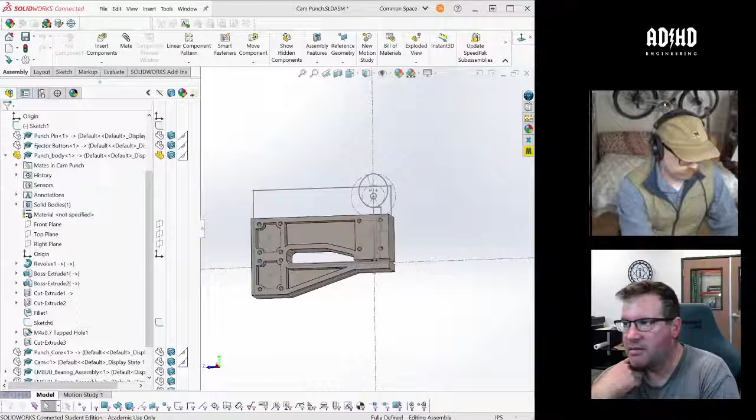Every week I'm like, man, I need to talk to AT&T and figure out what the hell's going on. And then, by the time it comes around, I don't.

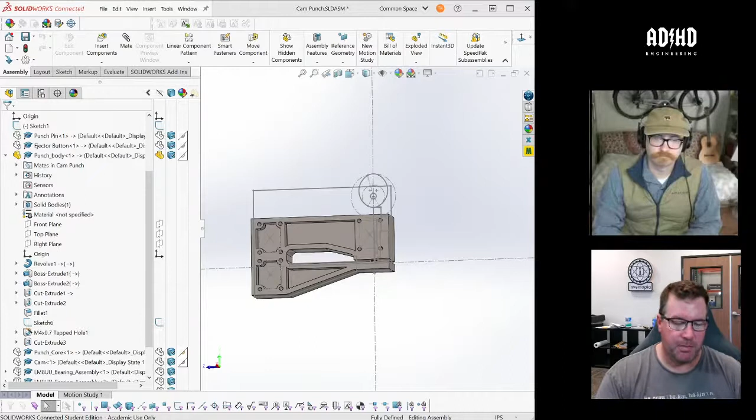The punching process is a pain in the ass. There's a website you can go to called Music Box Maniacs, and you can basically download these files and it outputs them for different types of music boxes, and then you have to transpose it and then punch it, and it's a pain in the butt.

But here's what, hopefully you can hear this. Come on. No? There we go. Are you ready? Live music. You ready?

Sweet, looks pretty good.

So I already know what that is, even though I definitely did not know you were going to play that, but that's great. That's the Office theme song. Yes it is. I thought it was going to be a little too on the nose if I started with a Wintergatan song.

Also, the song I'm really excited to play, that Sommarfågel song, is super long. I actually had to truncate this song to fit it on this piece of paper. But they do sell rolls of this paper that's like 20 meters long or something like that. I got one of those.

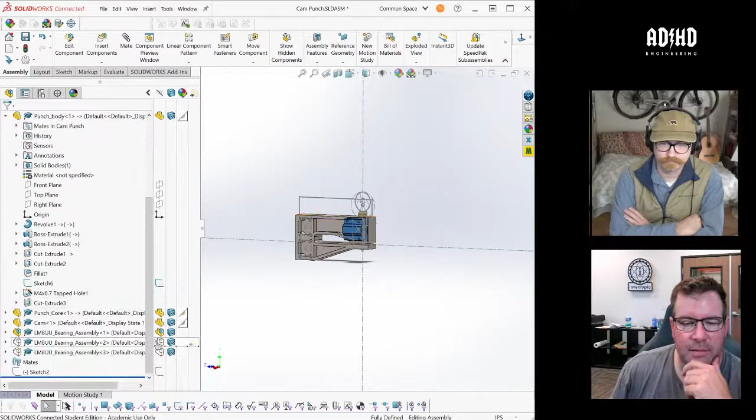So the idea is that we'll be able to put that piece of paper into the same music box, just pull it and write the music, and then switch out the playheads, switch out the punching head, playhead, and go from there. So anyway, that's kind of the idea.

Last week we were kind of talking about this thing. I need to mute my - I'm getting diabetes alerts from my son, pushed to my phone. Like, yeah, somebody ate some candy. I can tell across the internet and in real time. It's a new level of oversight there.

I know, yeah, if you didn't think I was a helicopter parent before, welcome to the future.

So anyway, this is what I was working on this week with this thing, and let me make sure I have... sorry, I need to make sure I have my windows open.

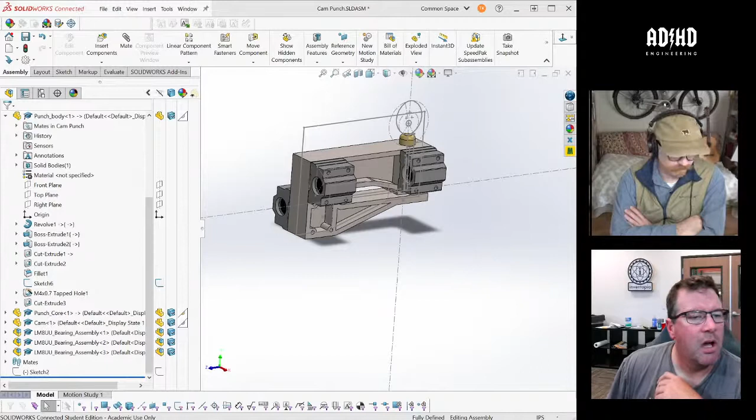Hey, Amos is with us today. Hey Amos, make sure I can see... where is he? He's on YouTube in the comments, in the YouTube chat. Cool. Hey Amos, so actually it might be good that he's here, because if we have questions about the

Configurations sort of thing. But anyway, this is my current approach with the punching mechanism for this box. Basically, we have a stroke of 72 millimeters to be able to shuttle back and forth across the paper, and then there'd be a punch here. This one will be operated with a cam attached to a gear motor.

I haven't drawn those in. I kind of had to go back and redo it. These are LM8UU bearing blocks. They are all over the place. They're used in a lot of 3D printer designs. They support an 8 millimeter shaft.

Obviously, I have some fillets to add to the corners there, but this is going to be one piece of steel. So I have 1 inch thick stock that I can make this from.

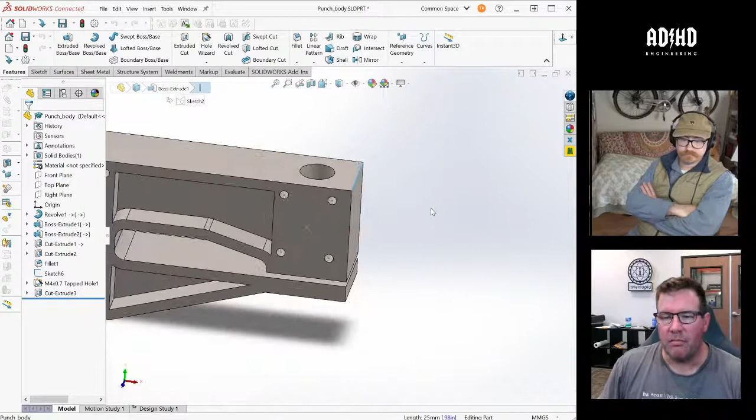And basically, this is going to reach over the paper and be able to punch it from both sides. And each of these mounting squares are where the brackets go, the linear components go.

And this is going to be hard to manufacture. I'm going to have to get a slitting saw to make this little narrow feature, and I'll be able to come through on both sides to make that clearance hole.

But the idea is that I can make everything line up. I haven't drawn the bottom hole, but I can make everything line up by machining all of the concentric bore features at the same time, so it'll automatically be coaxial.

I was worried about the punch coming through and not being able to line up the hole in the die. So,

Amos, I see your comment. We are in the E-Team meeting room. I don't know, oh yeah, maybe we should be in the CAD team one. I think that's usually what we have done. Is it? Because not everyone has access to the E-Team one, right? Right, I don't know, all right. Well, if Amos doesn't have, let's just hop over there while we're doing this.

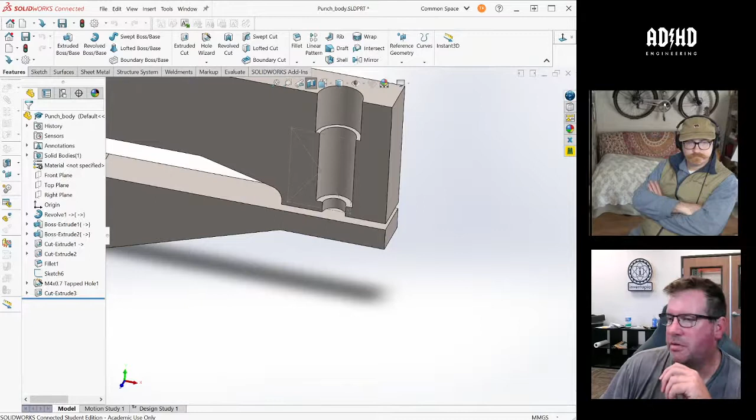So in any case, that's kind of the idea with this thing, is I'm going to start off with a big piece of iron, and then mill it away. I have to add these same kind of relief cuts, try to make it not be a billion pounds. So that's the idea, you could just have the holes going all the way through for the relief cuts if you want.

Well, you're not live, by the way, Tim. What's that? You're not live in Discord, Tim. Oh, sorry, share my screen.

So yeah, so that's the idea. This thing in cross section, I want it to be like an I-beam, basically, right? Have that kind of thing. I want to remove that kind of profile, but I do want the web in between. I don't want to cut all the way through. I want to leave that middle beam, but kind of lighten it up a little bit.

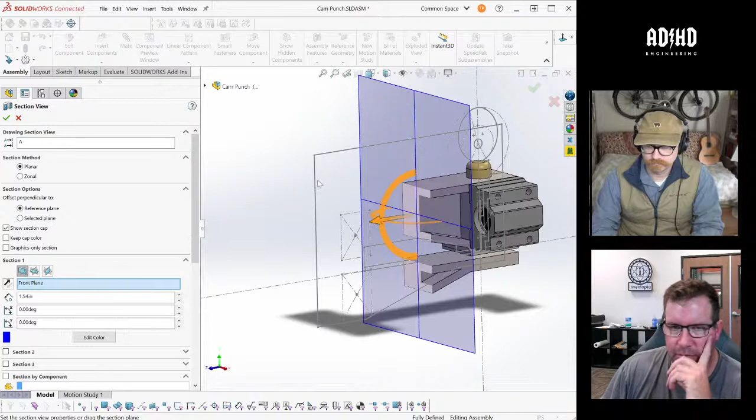The fun thing here on the punch, and I wanted to do something simple, and keeping this project simple in general is a good idea. But as I started working on it, I realized I had to do something a lot different.

So the way this is going to work is that the paper needs to be held by the punching mechanism, and here's one right here, right? If you look at this thing, there's a metal piece underneath it, right? And that holds the paper still flat against the hole as it punches through, because otherwise the paper wants to come up and get dragged into the hole. You need to hold the paper flat and then punch through.

And I know that when I've seen a lot of people making dies for cutting labels back when I was in the wine business, etc., they always had these basically like razor blades that were embedded in neoprene, and the neoprene would push the things off of the die. So

The way this is going to work is that there's going to be a spring in this cavity right here, which will allow this whole piece to move up a little bit, and it also is what pushes this ram of the button down.

So the paper will come in here, it'll be held against this thing by a little bit of spring pressure, and if there needs to be some compliance there, it can float up and down.

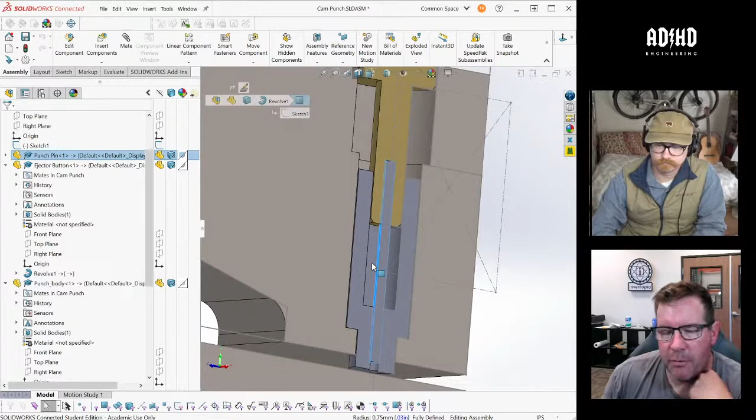And then this punch, this is a hardened punch from McMaster-Carr, for an ejector pin for a die or mold. I'm going to have to cut it down a little bit, and then this will be brass. So this guy will bear against this surface, this guy will bear against that surface. The punch will basically be brazed into this, or just soldered in, and then I'll be able to get everything to line up by making it all in one operation on the CNC.

So you need a hole on the bottom as well, so that the punch can go all the way through. Yeah, I haven't drawn that.

The math here is that I want basically a 7mm stroke, because it needs to be able to clear, and this punch needs to be able to push the paper all the way out the backside. Otherwise, you're going to have a plug of paper in that channel.

But anyway, so that's the punch head. That's kind of what I've been working on this week, and it'll slide back and forth.

I just got this thing, so I need to measure the punching force. I need to figure out if the metal gearboxes are going to be like the Pololu ones, which have these metal gear motors that have a lot of torque and move relatively slow. But I have to actually measure the force it takes to punch the paper, and then work it backwards to figure it out.

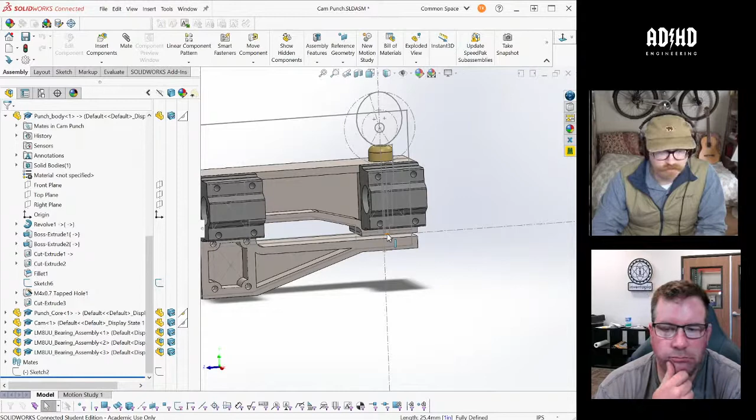Tim, looking at your feature tree, I don't see a shell feature. How did you get those cutouts? I drew them and then cut them.

There's a one-step feature called shell that can do that. Yeah, but I wanted to leave ribs in certain places. I'm fully aware of the shell feature, but I wanted to leave it here, and if you shell this thing, I can show you before that, you get some geometry that is hard to make and that I don't actually want.

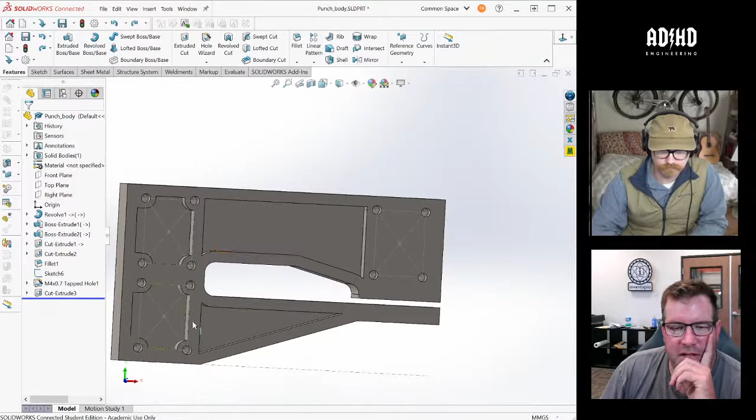I'm actually going to go ahead and on each of these sides, on the side that doesn't have the motor mount or the linear bearing, I'm going to take out these webs. This isn't, in terms of CAD best practices, still on the experimental side. I'm designing it as I'm drawing it, I'm not being incredibly deliberate about CAD, which is okay.

It's okay. Hey, we got new people in the chat room too. Oh yeah, Lund is here. Lund's here, happy to see him. I don't know the other guys.

It's okay. So anyway, that's kind of where we're at with this, and then I don't think I've put this into the larger Marble Machine CAD. So not the Marble Machine, the Music Box CAD. So this is what I have thus far.

I've had a little bit of experience working with these pillow blocks, and I feel like it's pretty hard to line them up. I don't know if you have any specific solutions to that. Yeah, you just have to - already as it is, the pillow blocks I'm using are threaded on the side that is going to actually be a clearance hole. So in this model, these threads are going to be tapped, so I actually have to drill through from the backside. I'm just going to make those holes a little oversized, and then basically put it together and tighten it up once it's all together.

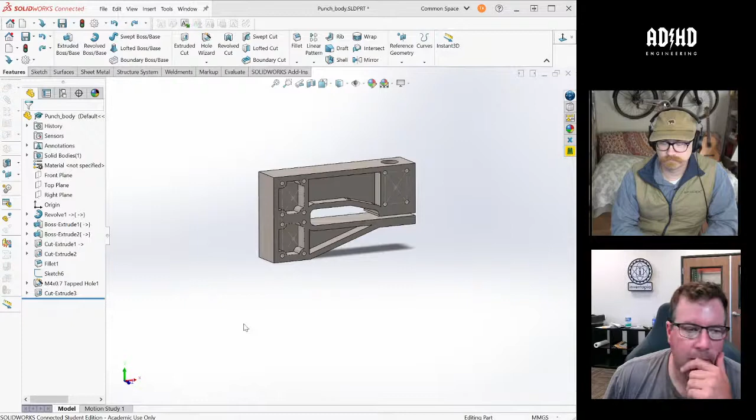So I'm loading in something, it's interesting. Oh, there we go. This was my previous version of this part, which was basically to use a solenoid to pull a ram. I didn't like the mounting plate on this, but basically it pulls this ram. This solenoid is the beefiest one I can find on McMaster Carr. It has a 1-inch stroke, and I'm turning that into 7 millimeters of punching distance using this linear slide cam. So this would be a block of Delrin, a couple pieces of bronze, and then this thing would go through.

This design doesn't have the ejector button on the bottom, which is not as good. Plus, I would have to make a hole here and a hole here, and everything would have to line up. I like the idea of machining all the parts that have to be concentric in one setup on the CNC. I just think that's going to be easier.

So, yeah, I don't know if it's easier necessarily. It could actually be more complicated in the end, because now you're thinking about going and buying a slitting saw and things. It'll probably work out in the end. But when you're doing things, especially prototyping, you don't want to go for perfection, and you want to stay within what you can do.

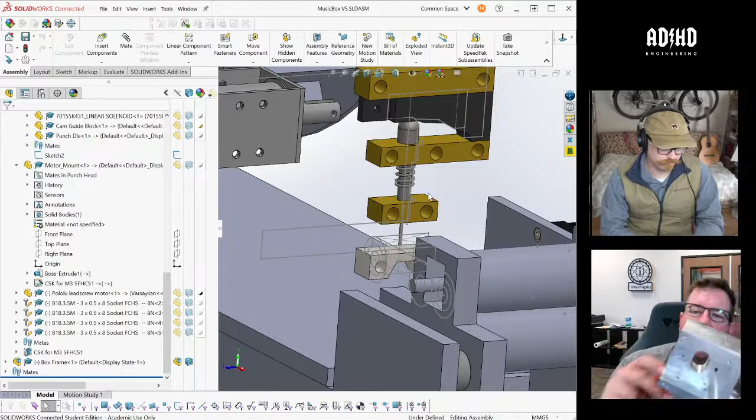I have to machine every single side of this thing. For a prototype, normally you'd say you don't do that, but this isn't a problem for me, I know how to do this. This isn't a technology risk, and that's generally the main thing — when you're doing these things, you want to avoid unnecessary technology risk.

For me, the new technology with this product is these new servos I want to play with. They can move super fast — you can just tell them to go, and they'll try to move as fast as they can before the expected position versus the real position starts to lag. So I didn't want to make something mechanically that's not totally rigid. I wanted to make something insanely rigid.

From this angle, I have 3 different size bores, a ball bearing, and a bearing that goes down in the middle of that, same thing on the other side. It's not the easiest, not a simple part, but it's a part I can do, so I'm not afraid of that. Like, a slitting saw, I've never done that, but I'm confident I can figure that out. It's not a reach.

That's like bragging.

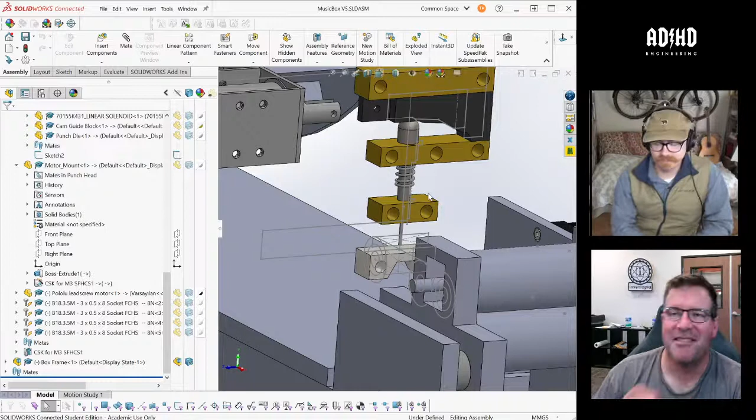No, it's just there are a couple of things to know about slitting saws, and the finishes they leave behind, and things that might end up compounding into other issues to work out. It might not just be about getting the saw, it's also about finishing the corners.

Yep, you won't have access to those two faces after you cut them. The other thing is spring back. Once you slit that, all the relief from those two massive pieces of steel separating means you might not end up with those holes aligned anymore. Probably close enough, but still.

Right, well this is going to be hot rolled steel. At least the stock they already have is, right.

So have you ever seen a YouTube channel called Edge Precision? This guy is basically, and it's a little bit like Abom79 too, where the takeaway from that channel is that machining is all about setting up, measuring stuff, taking a cut and seeing what happened. He was making a T-shaped drive shaft out of a 2,000 pound piece of metal, and showed how after taking off a lot of material, once he took it out of the live center there was deflection because of stresses in the metal, and once he relieved a huge amount of material on the side, it actually moved.

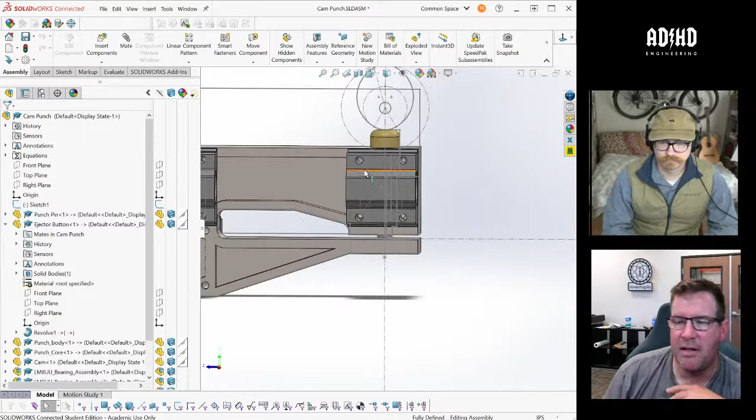So I think what I might actually do is make this slit and not relieve underneath here. You see this is a square piece, but make this slit so these parts can flex away from each other a little bit before I do the holes, because this is going to be in the same operation. The slitting saw can run all the way through here, so that if it wants to separate, it does that before I do the holes. I think there's a better chance of them being concentric, having given that movement a chance to happen once the two halves separate. Do that up front, yeah, that's the idea.

Anyway, so yeah, that's kind of it on the music box front. The drive rollers haven't changed. I worked on this configuration with these slides, but I've abandoned this, and so I still have to source a gearbox.

I still have to measure the force required to operate the punch, so that we can look at the torque of the motor and make sure it's going to have enough to get through there. I probably want a safety factor of 3 for that.

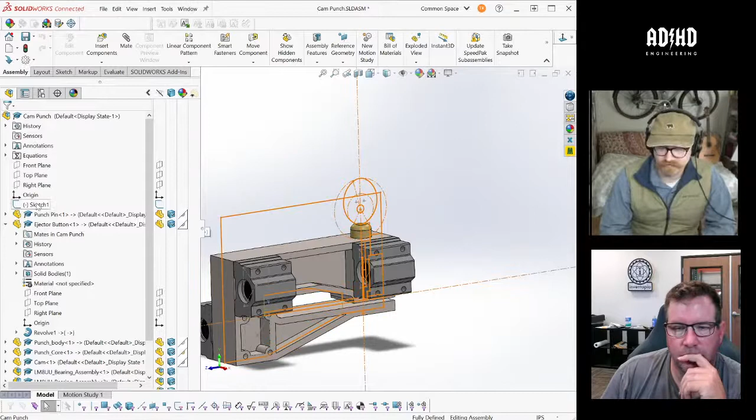Yeah, so this is the kind of thing you can actually test in the layout sketch in SolidWorks if you set it up right, that kind of cam-following motion. It's really good for that.

Yeah, I just, are there cam tools? Oh, there sure are. Really? Yeah, because I just made one that looked right. You can tell it's not quite... Sketch Tools, do we have this? Is it in Sketch Tools? Where are the cam tools?

It's actually not. If you go into the SolidWorks add-ins tab, there should be a cam feature in there, I believe. I wonder if it's just not enabled in SolidWorks Connected, or at least it has to be enabled. Let me look in mine, because I'm pretty sure I have that feature.

It's kind of a tangent anyway, but yeah, if you can pull it up quickly, then why not? I just did one where I set the distance between this inner circle and the outer circle to 7 millimeters. Let me get out of this.

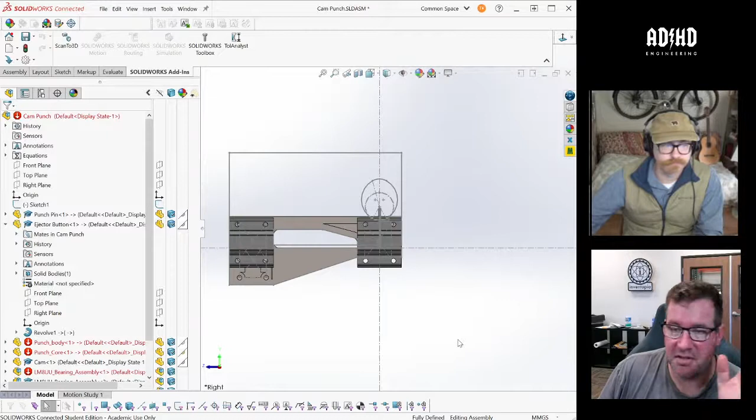The only thing that Fusion does that SolidWorks doesn't, as far as I've seen, is that SolidWorks will kick you out of your sketch when you change units.

Well, just out of curiosity, what's the point of changing units? Just because if my brain can't get around how big something is. I like to design in metric, right?

But I live in an imperial world, so I always turn on dual units. You just turn it on so all your units are dual? Yes, every dimension shows both inch and metric, and it's very helpful. Then you can live in both worlds.

The other way is when you enter a value, instead of calculating how many millimeters are in inches, you can just enter 1 inch and it will populate it in metric automatically. I do that all the time, whatever the metric is.

But sometimes, especially when I'm tabbing between SolidWorks and a supplier page where they're in inches, I'll toggle my SolidWorks into inches so I can see if this is compatible. But I actually think Amos's suggestion is probably the best.

Where is that setting, do you know? Is that in system options? It should be in options. If you go to tools, then to the bottom, it's options, and there should be a setting there.

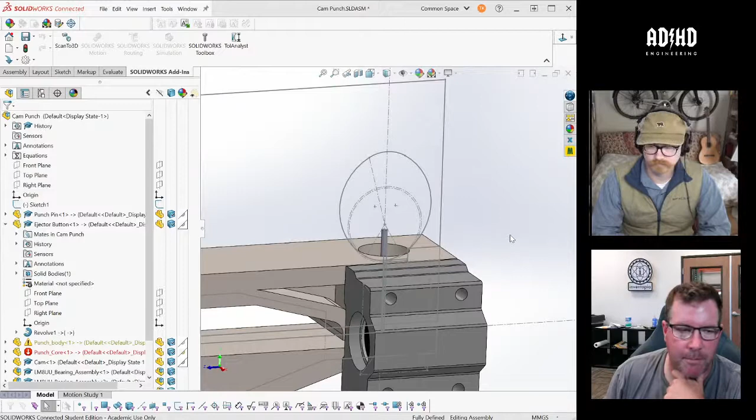Good, I missed the beginning. Oh, look, when I switched my units in that thing, it totally messed up my whole setup.

That's gross. All right, I'm going to close that without saving. Discard, let's see. All right, yeah, what, that's so weird. I don't know what happened there, but I was able to leave it without saving, so hopefully that will be fine.

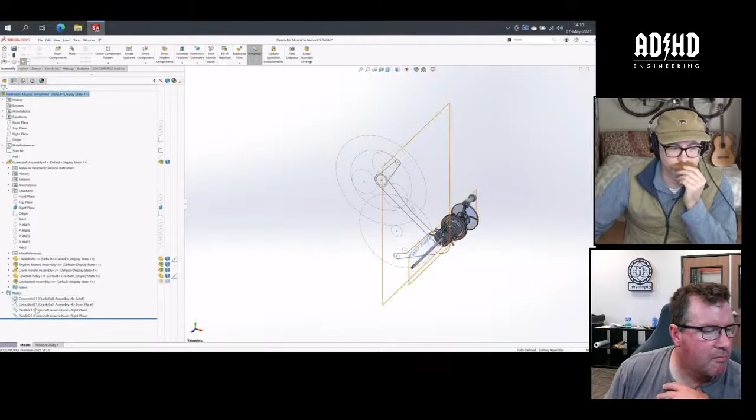And while we're at it, you can watch David load the crank handle. Let me see. I'm going to duplicate my... here. Nope, that's not it. There we go. So this is great. Well done, Tim.

This is called Fun with OBS, featuring Tim Keller and David Lewis. It's comedic relief. Oh geez, what are you doing over there? I know, it's horrible, I tried to. Wow. Okay, sorry. Oh look, I also messed up my reference one too. So that's amazing too.

Back to that dual unit display thing. Yes, it is a document setting, so you have to set it up in your template so that all the files that you make have that setting. You can turn it on for any document that you have open, and save it with the document, and it'll be saved going forward. If you go to the document settings and click on dimensions, the very top, not a specific dimension but the first one where it just says dimensions, right there is a dual unit. Right under the font button, there's a dual unit display checkbox.

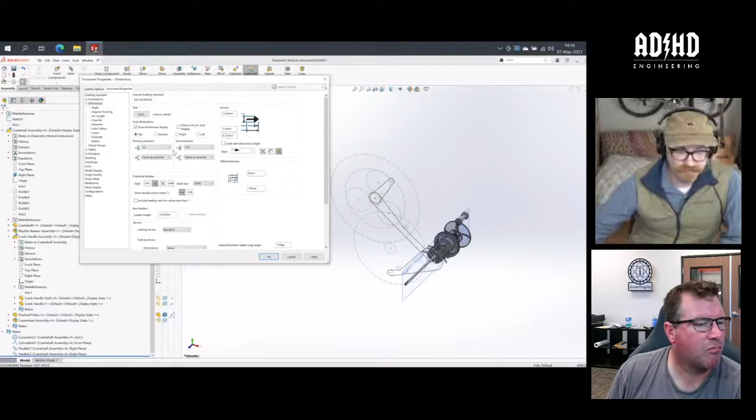If it looks like... because SolidWorks will estimate the number, or what do you call it, they'll round. Thank you, that's the word I'm thinking of. It will round, so it's much better to know if it's in 3 digits for a lot of reasons. But again, if you're a machinist, you know that in the metric system, all code for the metric system are generally, unless it's a special feature with 4 decimal places, uses 3 to the micron. So you might as well just design in the same units that you dimension in. Yes, so that's generally what I do. Or, sorry, design in the same units that I machine in.

So anyway, what you're seeing on the screen now is actually the Marble Machine file itself. This is going to be the end product, and I actually just moved this to its own collaborative workspace. This is now in, I think it's Marble Machine Studio collaborative folder, and that's all it's going to live there. It's just this guy, so that my other one, the working one, doesn't get all cluttered up. But anyway, I just opened it to show you that essentially the way this is set up now, it's fully defined. As the assembly grows, there'll be more and more stuff added, and this thing will be huge.

But I wanted to show how mates work when you're building it, but you want to test motion. So I've actually fully defined this particular subassembly so that it doesn't move. But all I have to do is suppress this one particular mate, and then now I can test to see if it turns. Well, sorry, that was the handle, I didn't need to do the handle.

That was the handle. What did I do? The heck? Okay, I don't know what the hell just happened, because I definitely...

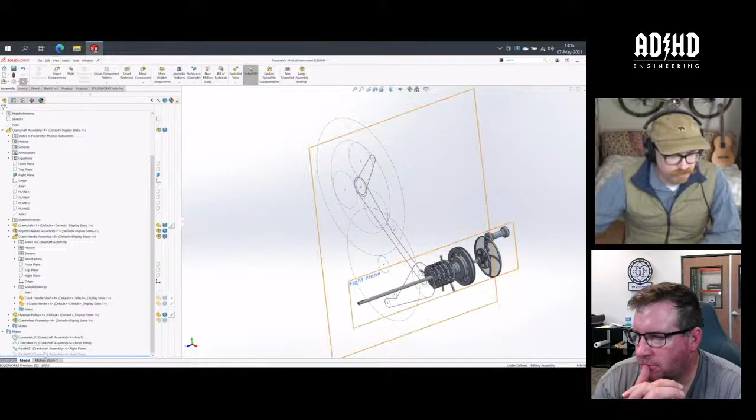Because you're giving a live demo. Yeah, exactly. You can see the handle, that's the one I am suppressing now. And yeah, so that worked. Then if I suppress the whole crankshaft, now it should be... and it's not. Okay, I give up. Anyway, that was just for fun to show.

Anyway, I'm going to close this, and we're going to talk today about the rhythm machine, which is actually here.

Okay, so the topic, a little bit of background here. David sent me a message saying, 'Are you ready for configurations?' And I was like, please, because I know they exist, I know they make a lot of things easier. I actually personally want to use them if I can, but I never have. So if you hear me asking a bunch of dumb questions, it's because I have zero experience with configurations, and I'm eager to learn. Sorry. Okay, yep.

No, that's fine. So the rhythm beaters that I designed originally, I recreated in SolidWorks. I did it as a part, based on the detail file that Andre did. Right, so if you know anything about...

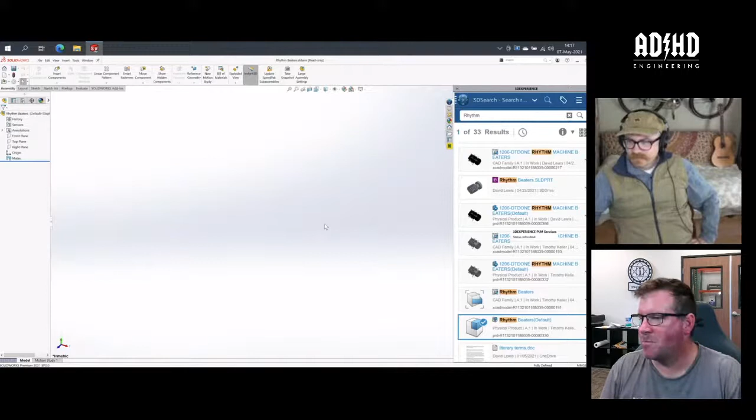Actually, where is this? Did I delete this already? I might have deleted it already. Hold on a minute. That's what? Did somebody? All right, this is weird. It's been corrupted, it's now educational. Well, not only is it educational, it doesn't exist anymore. I don't know what the hell's going on with that. I don't think I touched that, but everything I touch will get corrupted to educational for sure.

Well, I guess it doesn't matter. I was just going to open the original one that I designed as a part. Here it is, this is it right here. I don't know what happened with that. Okay.

And any day now, what is it doing? Yeah, you got to be patient with Connected for sure. Just a totally random thing, I just tried to update my 3D Experience to the latest version, and it was like install failed, and now I can't do anything. That's great. Okay, so yeah, and this is the mystery one: some files could not be opened. It happens almost every time I try to open something, but not all the time, which is weird.

But okay, so when I sent him this message, I had already created this—it's virtually identical to the part that Andre made. Did you make this, Andre, in Fusion? I redrew it, yeah. Okay, so I did the same thing in SolidWorks.

Sweet. And then I realized something: it got super weird when I realized that the drumstick tips needed to be different lengths. I had designed it and then patterned a bunch of stuff, then put all the holes in. And then I realized, actually, I should have made this as an assembly, because for a whole bunch of reasons, this qualifies as an assembly. There are configurations of various parts.

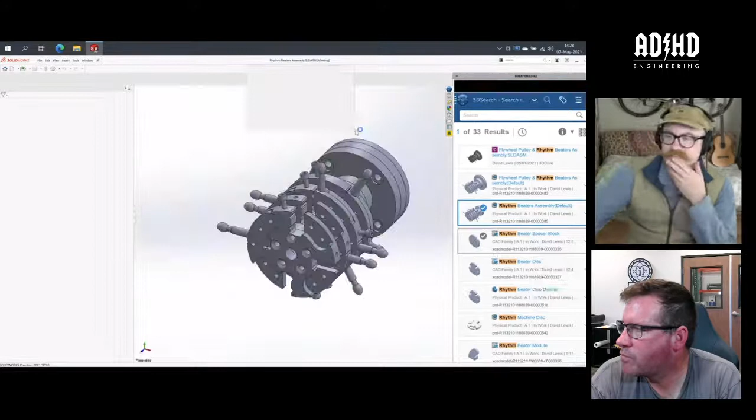So I believe I have - thought I deleted this, but I guess it's still around. Okay, so it's still here. Okay, so that's why.

So this was my first iteration of the Rhythm Beaters assembly, and it includes the original part file Rhythm Beaters, which we're getting rid of, and the Rhythm Beaters mounting plate, which I designed as a part.

And I decided to make this an assembly because Martin designed this so it could be rotated to be timed properly. I'm not exactly 100% certain if he followed through with using that feature, but I noticed in the new video - or new, it's like a year old, probably even older than that - that this was definitely designed to be rotated in timing.

So I actually included 4 holes because it's obviously his intention. I don't know if he's replaced this with one with 4 holes or not. Yeah, I was going to say, I think there's only 3 or something when I was looking.

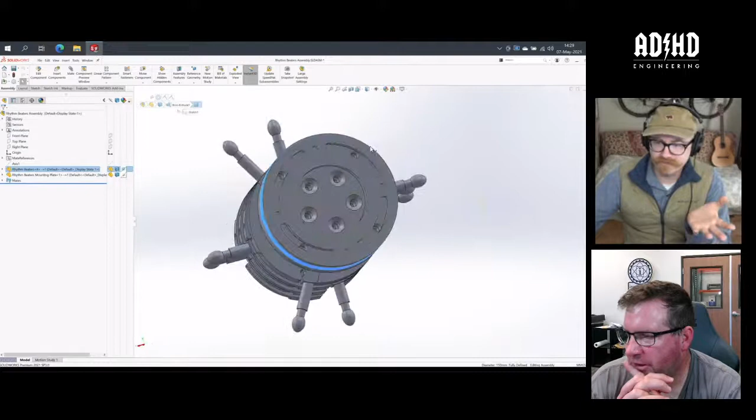Well, yeah, but the mounting plate that he made for the new Beaters assembly has 4 slots. Right, there's definitely 4 slots in the back. So I don't know, because he doesn't show it in the video, but I assume that this has been replaced by one with 4 holes.

I don't know, but it's also, by the way, very easy to change. So I could just say, nope, it's 3, there's 4, or there's none.

You're bringing up one - yeah, I think we talked to him about this a couple meetings ago. And Martin mentioned that he had initially intended for this to be the way that you adjust the timing, but then you got the timing clutch, and so now the timing clutch is basically doing the job that this would do. Yeah, it doesn't use this. Okay, yeah, and I assumed that was exactly it.

So again, yeah, I'm not sure what to do about that. Looking at this, I hate to put 3 holes in this other part and then have it not line up. But on the other end, it's also how the thing exists in the real world. So yeah, we got to be super careful about that.

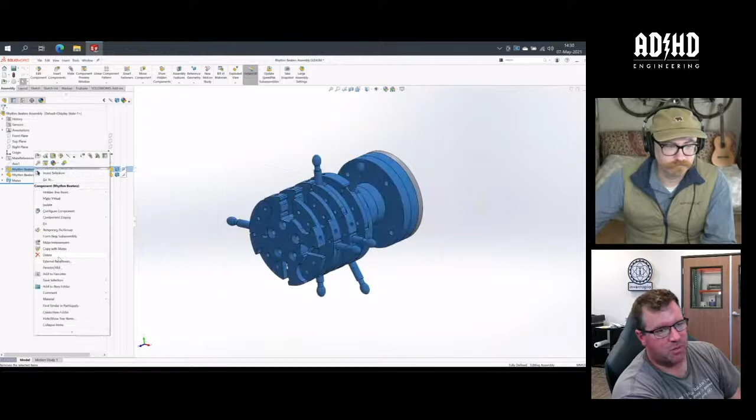And I think I was mentioning that, and I've actually talked with both Maureen and Andre about this, which is that for this first model we need to make sure that we're not slipping in our new ideas into this first model.

That's the Fusion model. You're talking about the Fusion model - what we're doing in SolidWorks now, right? For this kind of baseline of the porting, we need to just be translating the Fusion model and not fixing.

See, I thought we were just going to do the new MMXT in SolidWorks. No, and the other one in Fusion. Well, we are leaving the one in Fusion, but we're doing the MMX Studio as a design exercise first of all, but second - okay, I was not on board with that.

As a place to start from when we do the touring. Yeah, because unless we do this, first of all, we're just going to sit on our butts forever waiting for you guys to be done in Fusion. But the second thing is, we have to have a thing to start from.

So when there's an A/B design review kind of proposal for a new whatever, you take the part that exists now and you say, okay, well, this is what we got now - what do you think of this new thing? And without a SolidWorks equivalent, it's kind of hard to make those decisions in the SolidWorks space.

I also think some of the hesitancy that Martin has about SolidWorks is the fact that we have so much in terms of existing design in Fusion, and so there's kind of a platform.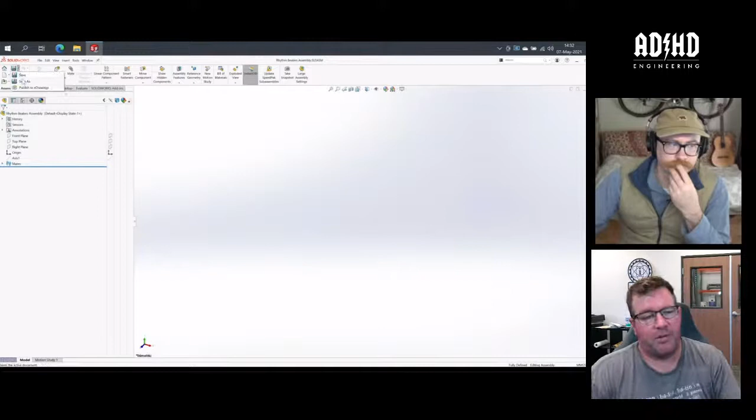So while we're waiting for the studio machine to be finished, if we can be bringing the thing over into SolidWorks because we enjoy working in it and it's good practice. I learned SolidWorks 2011, there's a lot of new stuff, so I don't mind doing it. If we can have the existing Marble machine in SolidWorks, all the better.

That serves that purpose too, so Martin can feel more confident moving on to the SolidWorks platform, knowing all the existing stuff is there. But that presupposes we need to not be changing things - even though all we want to do is fix these designs, we have to hold back in that first phase and not make 4 holes. Not to pick on you, but we need to not do stuff like that.

It's also super simple to just change it from 3 to 4. When it's a hole and it's a pattern, you just change it.

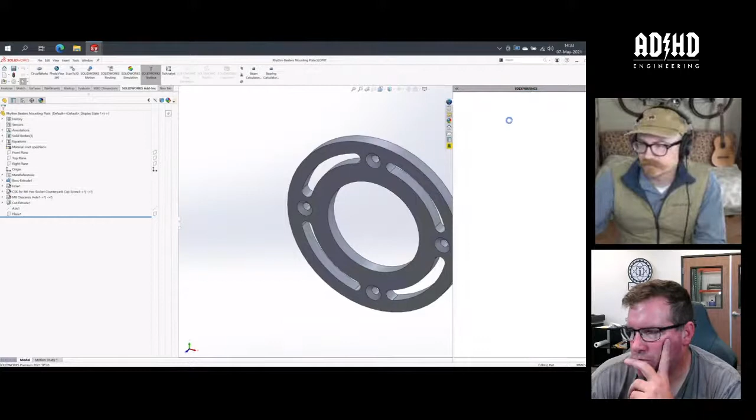Okay, so I'm going to open some parts here. This is going to be one of them - I had it open a second ago anyway. So this is one of the parts, and if you see, I've got 2 windows open in SolidWorks. This doesn't necessarily work very well if you have 2 instances of SolidWorks open. For those who've ever tried that, you can run SolidWorks as if it's 2 computers, or 2 separate instances side by side, but in this case I've just got 2 parts open within one.

This assembly process works a lot better if you do it this way. So we're going to start off - actually Tim, I was going to create the assembly and then talk about configurations. Do you want to just talk about configurations alone, without building the assembly? Whatever's easiest for you. It's just I get long-winded, and I'll be here.

Let's do that. So I'm going to open the disk because that talks about it. Can you make a 3-hole and a 4-hole configuration of that disk? Yeah, that's what I'm doing. Oh, that's good.

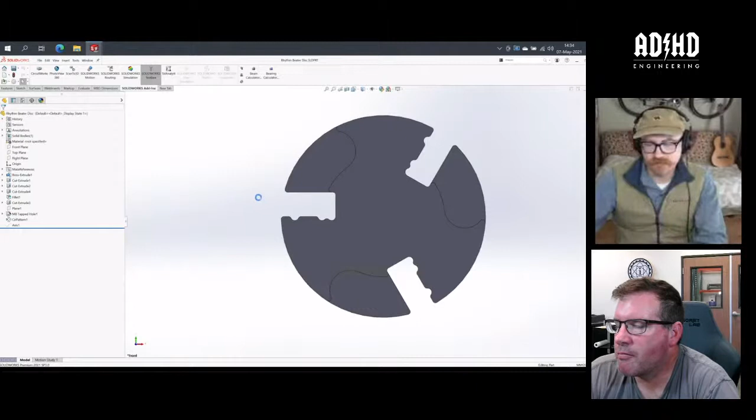Okay, so this is the Rhythm Beater disk in its default configuration. Right now I only have one, and it's the default configuration because it's the first instance of this disk that's in the machine itself. I've already added and deleted configurations to this for this demonstration, but the idea is there's going to be 4 of them, and one of them has 3 holes, and the other 3 of them have 4 cutouts. So you think, well, what do I do to make a new configuration that includes those things?

And the first - exactly, yeah. This is where it gets tricky, because unless you've come up with all of the features that you're going to pattern or change the configuration for, it can get really tricky if you add this other thing too. So I need to make sure all of the configurations get this thing. It's a very deep hole to fall into, and I just recommend being mostly done with your design before you decide to start making new configurations.

And it's a hole I fell into, and I realized what I did wrong. I just want to mention, don't repeat my mistake. I think anybody that's really getting started in this tries to make those mistakes too.

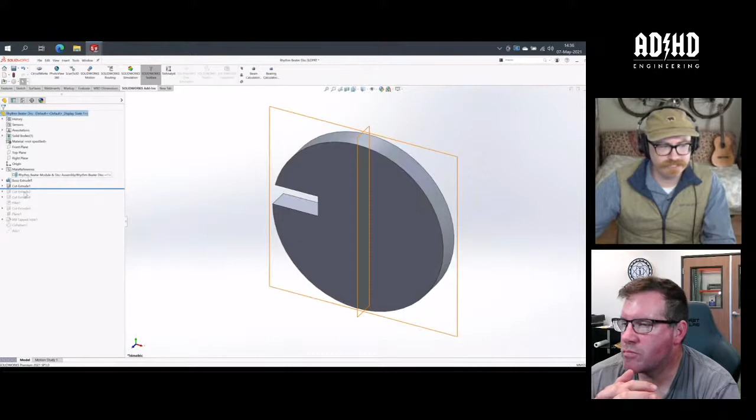But okay, so first let's just do a quick rewind of what this part is. You start out with a boss extrude of a circle. The first thing you did was put a mate reference in. The mate reference is durable - it's actually missing the axis, so it just lives at the top. That folder can't be at the bottom. Oh, but let's just say you didn't put it in at first. No, it just lives there.

Okay, got it. If you notice, I dragged this axis up - yep - and now when I highlight this, it actually includes the axis. Yeah, love it. So, okay, the first step is boss extrude a disk, and this is where I talked about this with Tim last week.

I don't do revolves unless it has features that can only be revolved. I think it's a better idea to extrude something that's flatter than it is round.

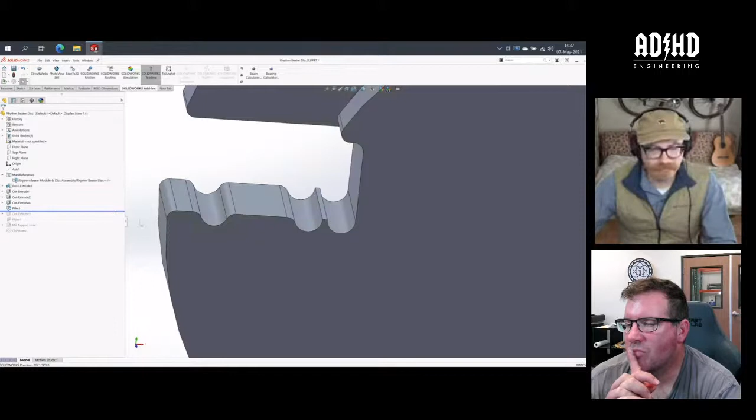So the next thing is to do the first cutout, then the second cutout, and then these holes, and then filleting everything. Unfortunately, because it's too small, I have to fillet that separately. SolidWorks doesn't have a very good feature built in for it. I found out actually that xDesign in 3D Experience does have a full round feature, but it's still a little buggy and it didn't work out right.

So whatever. But so you drew a little half circle and cut it out, is that what happened there? No, I drew a full circle. Okay, oh, you mean for the fillet? Yeah, to do that, because that was a cut extrude you did there instead of a fillet, right?

Yeah, so if you see the sketch, I just took the thing and did a convert entities, and then fillet on those two opposite sides too, right? You can use a face fillet feature. I mean, it would still be a different fillet item in your tree, but you could do a different type of fillet, do the same. Pretty sure, a face fillet, yeah, between two faces. Anyway, don't let me distract you.

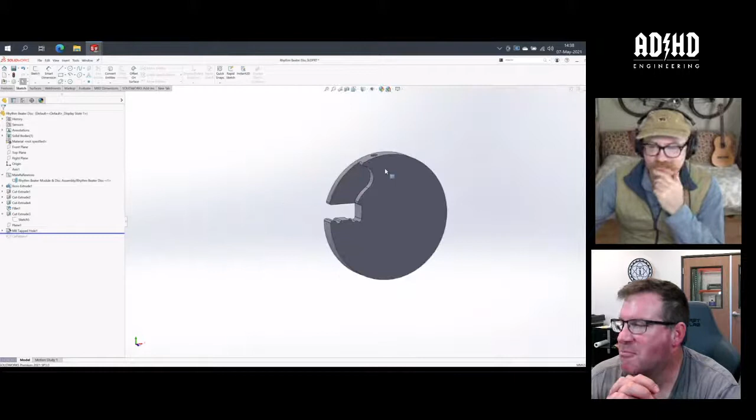We're looking at configurations. We can do fillets next week. Okay, and then I added this M8 hole for the screw, and so these are the features that are going to be.

And so then I did the pattern. So now this is the part, and now I need to make one that has 4. So it's actually pretty simple. I'm going to create a new configuration by right-clicking and saying Add Configuration. I'll just say 4 instead.

Okay, so now I've selected the 4 configuration, and now in circular pattern, I edit the feature. And if you notice, now under all the things that I can attribute to configurations, there are places to select that. So I'm going to go to specify configurations, and now it gives me a little box that allows me to set which configurations this change applies to.

Oh, that's super cool. So in this case, I do not want default, so it's only going to apply to the active configuration, because this list would be populated by however many configurations I've made. So in this case it only applies to this one. So we're going to say 4, and we're going to change this to 4.

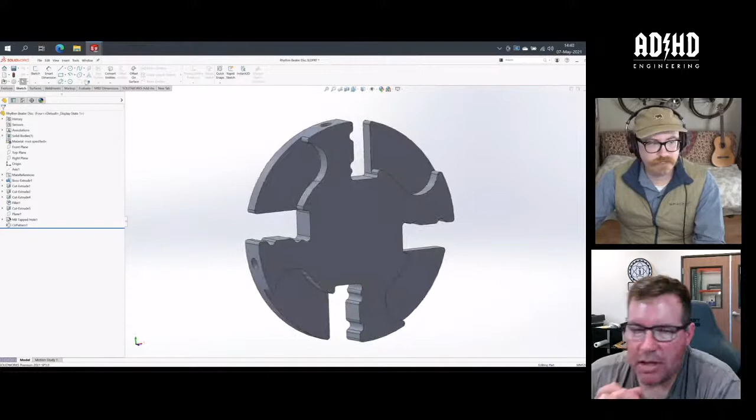Now I can also do it by just selecting this configuration. That essentially does the same thing. So now I've got 4 here, and I press go. So now I've got 4 here, and now just for fun, that's sweet. Now I got 3, yeah.

So when I bring this into the main assembly, I can tell it to select which one it uses. But most importantly, and this is actually how I did the actual lifting fingers in the original file a long time ago, since there's 38 channels and there's 5 different configurations, you can pattern it down the line and then just tell each pattern which configuration to use.

So Fusion doesn't do that, unfortunately. You can't actually—wait a minute, so in the pattern, you can select individual elements in the pattern and change the configuration within the pattern? Yeah, so I'll do a short example to show you what I meant. Yeah, that's pretty good.

So let's just start a new assembly. We will not do this—move this over here, this guy over here. Okay, so just for fun, we'll take this guy, we'll bring it over. We will mate it, so float. But the closest thing you can do in Fusion is you derive the disk and then do the different changes as 2 different parts or something.

Yeah, exactly. Okay, so I've now brought this in. I'm going to mate it now, so let's just for fun—I'm going to do the quick and dirty version because, frankly, I'm in a hurry. Front plane. Go. Plane, and we'll go. Oops.

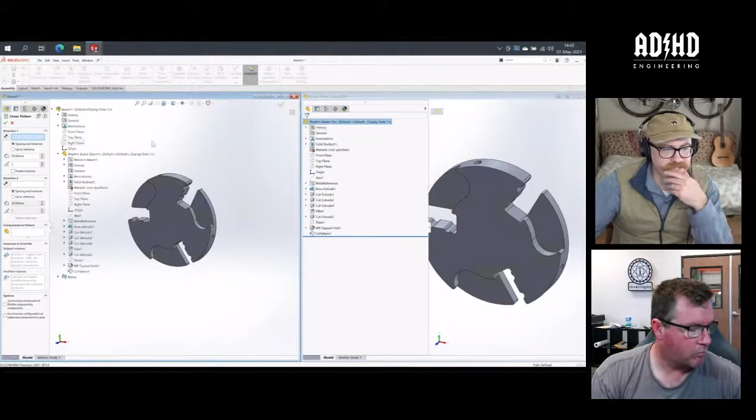Okay, so here is our single instance. It's now fully defined and mated. So let's pattern it. We're going to go in the direction of, usually I like to put an axis in this, but I guess I might be able to pick up this axis. Yes, I can. Okay, good. So I'm going to say 36 millimeters apart, we'll say there's 4 of them. And we're going to say it's this guy. Okay, perfect. So now we've got 4 versions here.

Now I know the first one is going to be 3. I know this one's going to be 4, that's going to be 4, and that's going to be 4. So all I have to do now is go into my local pattern, click this, and now if you notice, this little window doesn't normally show this box at the top that's default. You see how it says default? Oh yeah, I don't know if I drop down, those are my configurations. Oh sweet, so I just select 4, boom.

Now the second guy is going to have 4. And now do it again. Select this guy. Good. Select 4. Select this guy. So awesome. Select 4. Boom. So now, good.

I'm gonna say, so we could do this for like all the vibraphone plates. Yeah, so that's the whole point of it. I'm sure there's places like with the registrators, and there's a bunch of other places where there are, and there's like in the muting system, there are some places where there's some levers that go up and down. So we can design basically all of those variants in the same part file, and then just use whatever version of that part file where it's needed.

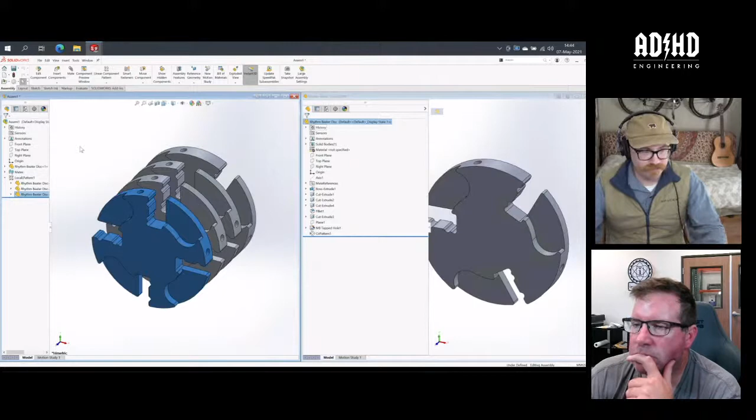Exactly, and so you can do something similar where you have like a vibraphone bar as a part, and there's just one, there's no A flat bar, whatever, there's just one. And then you use your global variables and a bunch of math to determine what the shape of each particular note bar is, and so now you've got a vibraphone bar file with 30 something configurations, and each one ends up being a specific note.

And then you take that and you pattern it across a plane, and then it ends up being like your vibraphone assembly. And then you just select which note goes where, and then you can tell it, okay, well this particular scale is for song whatever, right? So now you just configure all of your bars in the configuration for that song, and then you save the assembly as a configuration. So now that assembly can be configured to song A, song B, song C. Loadouts. Yeah, so you don't have to, there's nothing to do except select an existing configuration. When you build, and so that's efficient CAD modeling.

But the other thing is, this is one way of doing this, but in reality, this is not how the assembly is going to be built. When I bring in the disks, they're actually going to be rhythm beater disk assemblies. And so, for example, I have the drum, the other clamping components in there, right? Right, well so there's the drumstick. Well actually it's not, what did I call it? It's the rhythm. Yeah, you think you want to do those as configurations of this disk, or do another level of assembly?

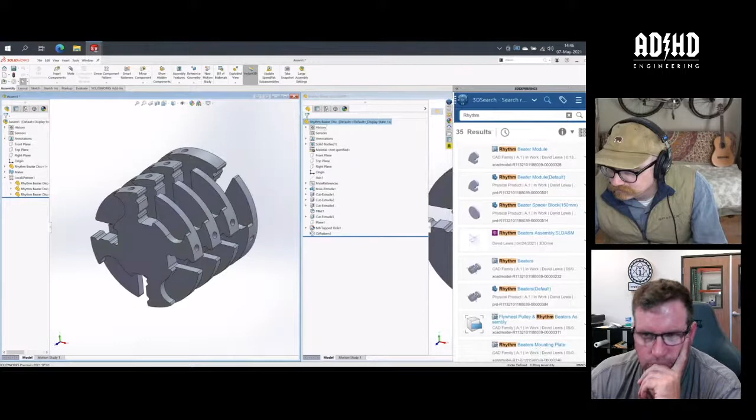Exactly. So I just showed you how you configure and pattern parts within an assembly, but this is a little too simple because I deleted a lot of stuff before this, because I wanted to actually show this as an example, but unfortunately. So I'm wondering if we're doing something like the vibraphone design, we could just design the way that one vibraphone plate is held and then pattern that, like the whole holder and the entire setup just for one note can just be patterned along and configured.

Yeah, now there are some drawbacks with patterns. Okay, do tell. For example, mostly related to motion. So if you have a whole bunch of objects patterned and each one of them you want to grab a lever and pull it, they basically all move together as one. And so if that doesn't matter, if you're just trying to get it all together so it looks good, but if you do want to try and explore different motion studies, pulling different levers, moving things independent of each other, the pattern kind of acts as one thing. Got it.

So in the vibraphone, if you wanted to show the deflection of the vibraphone independently, because they do move, instead of doing a pattern we would just insert the number of whatever, 13 things, and we can still use the configuration though, right? We can still make a dynamic. Oh, absolutely. That's actually a very good point, and he's right.

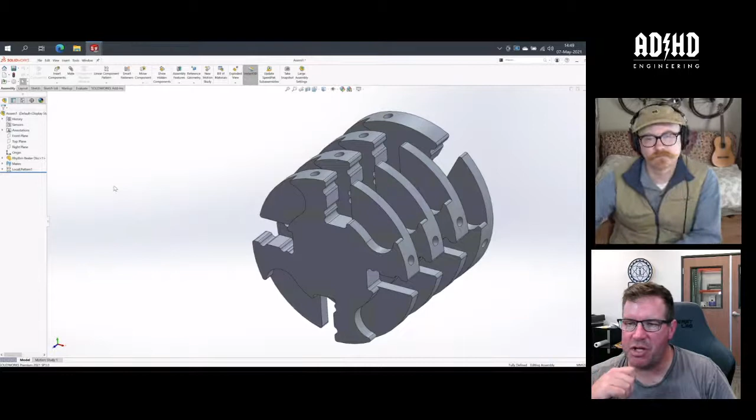So like, let's say if we have some equations about how the vibraphone plates change, right? But you're not going to pick a circular pattern, you're going to pick, it's going to be like a length distance that's going to be in your variables. That works. Or does it use multiple variables and you just change what dimension you use for it?

You see what I'm saying? It's going to be like a relation. You're just talking about changing the pattern. Yeah, you could do that.

Or, so like in this example that David just gave us, right? He made a new configuration and he made a change to one feature, which was a circular pattern. In the case of the vibraphones, you're probably going to be extruding a rectangle. It's going to be a certain length, and you'll probably control that length in a sketch with reference to a global variable, the dimensions. I know what you're getting at now, configuration, right? I have the perfect example to show you because that's actually good.

So that works perfectly in this drumstick tip assembly. This is a commercial product I bought from McMaster-Carr, which by the way shows up over here now and tells you how many of them there are to buy. But anyway, so this spring I bought or downloaded from McMaster-Carr. The drumstick is also actually an off-the-shelf component. I don't know, it is actually, I guess, modified, an in-house modification. Well, the spring's modified, so.

Well, you're absolutely right. Actually, if you look at what's actually on the machine right now, there's like 8 different brands and sizes of drumstick that he used. Like, I really wouldn't worry about that.

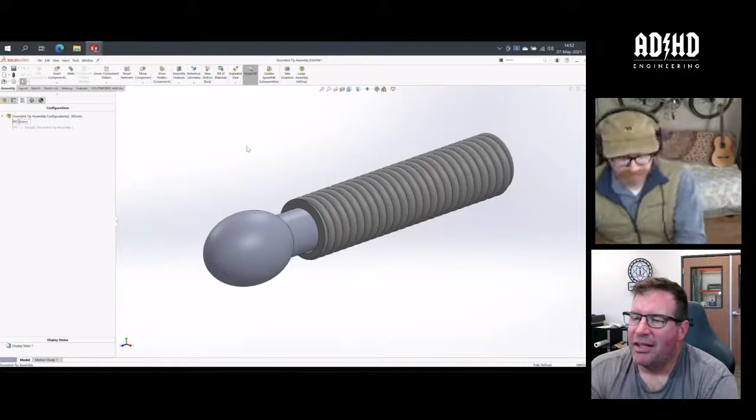Boom, it's a 42 millimeter. That's what you wanted. Do you still want it? Sorry, I missed that. Okay, no it's okay, that's good.

Now we're going to do a... Oh wait, you know what, I just thought of something. I need to, no wait, hold on. You're just making it smaller, right?

Yeah, I realize I have to add a feature first because if I don't do that, it won't propagate. So let's not do that, we'll go here. Can you just change the dimension in your sketch, say, for all configurations?

You'll see, just keep your pants on. All right, I wasn't trying to take them off, but it's okay. Yeah, don't worry about it. I'm making a 42 millimeter plane right there, boom.

Okay, so now I have a 42 millimeter plane set right there. Oh I see, I thought that, okay I understand now. I thought you would make it shorter, like in the other way. It's okay, and I will.

Let's say... you know what, I don't even need to do it because all I have to do is select the plane and then it will show up. There it is.

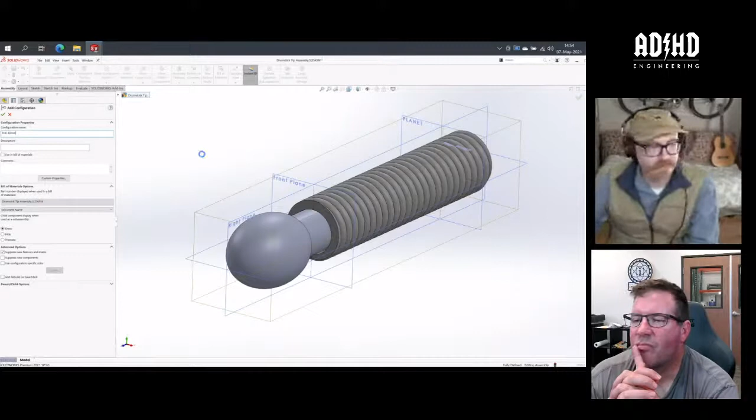Okay, so now I'm going to go in and manage my equations. And now if you notice, in my equations, there's now a hot configuration. There it is, got it. Love it. So I can change these global variables when I'm in, and actually I can also do this from here, because cut plane is at 42 for this configuration.

Right. But if I go back in... not show properties. I don't know what it just did. Okay, manage equations, awesome. Now I'm going to change it to 50.

I'm going to go select the configuration I want to change it to, and go okay. So now you selected them all, I think. There, I think you might be right. So let's just go back to the default. Okay, so my default configuration is at 50.

If I go back to the 42, it's still at 50 because I did it wrong. Let's just go to that, and then enter. Okay wait, now you can just change it to 42 here. No, just leave it to this configuration.

I did it, it didn't change it. 42, it's here because you didn't change it to 42. It still says 50. So now change it to 42. Yeah, so this should be good now.

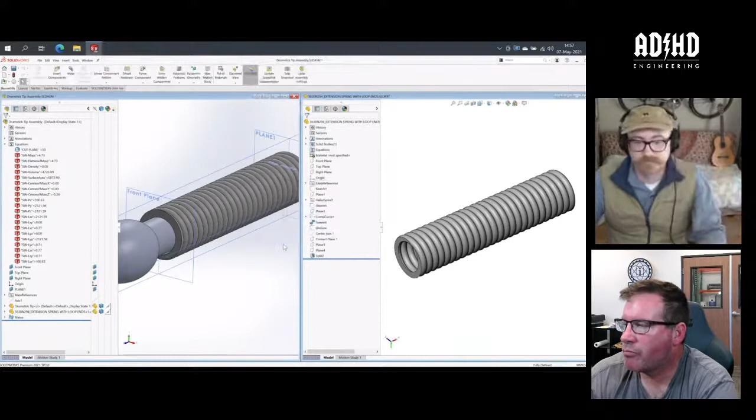Thank you, Paul. Let's close you, don't save. Oh come on, I just did that. Okay, what are we doing here? Okay, full screen it, yeah.

Oh wait, you're right, I don't want to do that. I want to edit the part. Okay.

So now this equals that. Boom. So now I think, are we at 50?

We are at 50. So let's actually first stop the component, rebuild. This might not work because of how I built it in this particular case, but we're about to find out.

So now we'll go in our equations, manage our equations. Actually, no, we won't do that. This one spring thing is so complicated.

Boom, did it change? The plane did. Yep, it did. Okay, but the spring is not smaller. Well, it doesn't have the cut operation in there, but the plane did move. It was the circular reference.

The way that I built this, I created a plane from the center line. I'll open it again and show you what I mean. So I created plane 3 that's 25 millimeters away from the center, and then I created plane 4 that's 50 millimeters away from that.

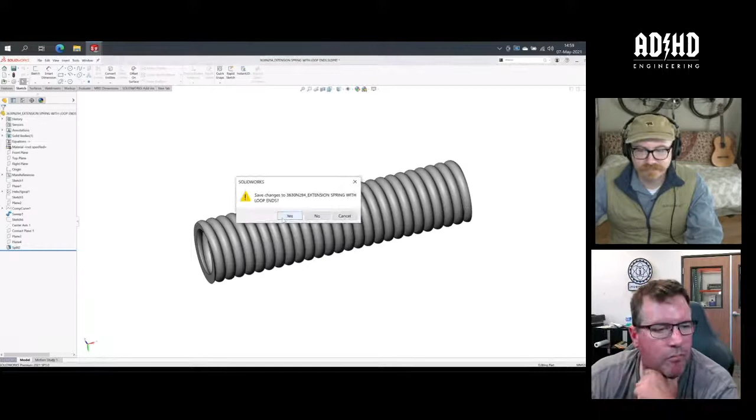So I need to make... I know what I can do. Okay, tell you what, I just figured it out. I just figured this out. Let's now go back here, we'll edit this, we will make plane 3 be...

...this divided by 2. That should do it.

Okay, so which configuration are we in? In 50. If I do this, it should change to 42 now. Yep, and it came off the backside. But yeah, it's still not 42 millimeters long.

It's because you did the divided by 2 and didn't do it on the first plane. What do you mean? Isn't the first reference you did still 42? I don't know, I'm not exactly sure what your logic is here, so maybe. Oh, it didn't change this. It didn't update it.

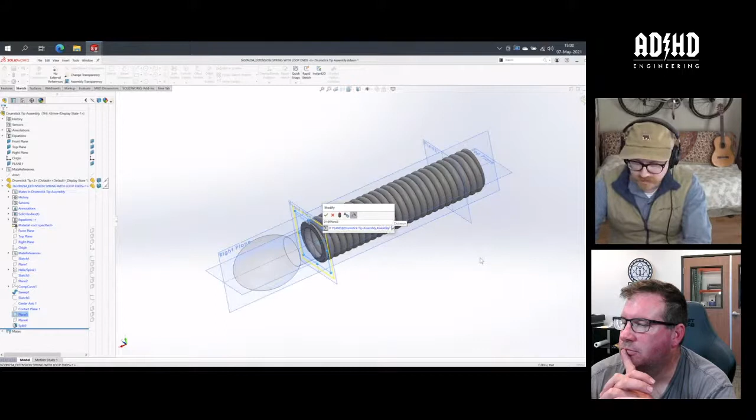This should have been updated. It didn't update. Cut plane at drumstick tip assembly dot assembly divided by 2. This shouldn't say 25 now, it should say 21. There it goes. Now it changed. Okay, what happened to it?

What is going on here? So plane 4 should definitely now be... and you might have set these references up. Oh, I see what you did. You may have set all this up differently in the beginning, knowing that you were going to do a configuration. Yeah.

I probably should have done this slightly differently. But hey, can I ask Amos a question? Does the way that David is doing this, specifically not making the configuration until he's adding the parameters that are changed, does that smell right to you? Does that jive with the way you understand this?

He unmuted himself, so now he's still there.

Oh, look at that, I lost my global variable. The problem, this one never saved, for some reason. Maybe because you closed it at some point. Maybe, who knows?

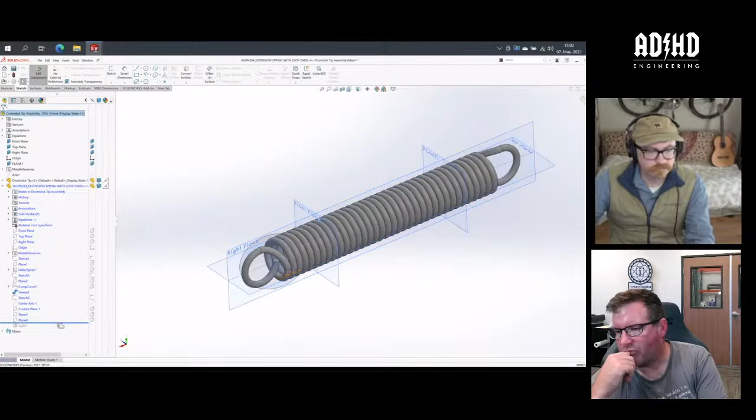Okay, so, Amos, jump in whenever you can. Can you hear me? You can, okay good, I'm sorry, I had to leave, I'm in my car now, but I can hear you. I just can't see what you're doing. Oh, okay, well then you're useless.

Ooh, this is looking good, looking promising. Yeah, I think I just fixed it. So we're in 42 now. I'm going to change the configuration to 50, and the plane moved, but I think I have to reset. It doesn't cut.

Wow, okay, this is an issue. Something I have to... So okay, there's another way of doing this, and that is to make two of the spring. I think that's probably what I'm going to do right now. If you guys want to wait a second.

I have a question, if you create the split command in the assembly, can you do that? Is that possible? Yes, actually, I probably could do that. Yeah, actually, because that is an assembly feature, I can do... Actually, no, the split is probably not a feature for assemblies. Lame.

So to be honest, this is actually not the first time I've seen updating configurations not be instant. It's kind of bizarre, but let's do this. I'm going to open this part.

Seth the cat in the comments is asking what this is for. This is part of the rhythm beaters, the little hi-hat underneath on the crankshaft of the MMX that does the consistent drum beats. These are the drumstick tips that pop out and hit the rhythm hi-hat.

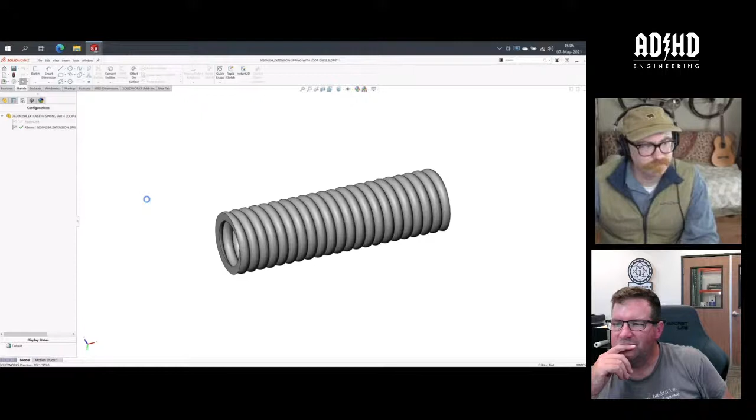Okay, so let's create a new configuration. We'll call it configuration... Are you making use of Control Q, the rebuild? I use the... I've always... Wait a minute, what do you mean Control Q? Is that assembly rebuild? If you use the little button for rebuild, it only rebuilds back to the latest feature, but if you do Control Q, it's a full rebuild.

And I habitually have my fingers over that, because anytime you're changing global variables or stuff like that, Control Q will rebuild the entire design from the ground up, and it gets the job done. Huh, okay, thank you. We're seeing some things rebuild and some things not. Yeah, there's just some things in SolidWorks that don't rebuild instantly, and there's actually some settings where you can intentionally not rebuild things because they would take time. But in assemblies like this, it's not very big.

I always hit Control Q - if anything acts funny, hit Control Q. To be fair, it's not something that I knew. I appreciate that, Amos. You're welcome. Okay, so now I've made on Mac - isn't Control Q quit?

Actually, it's Command Q.

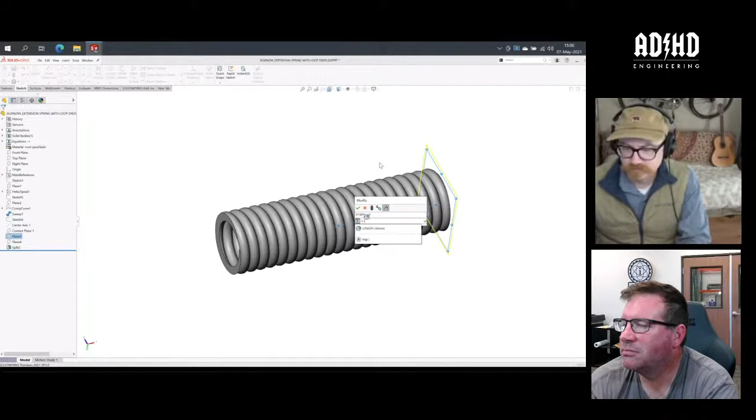I've now made a global variable called length, and plane 3 and plane 4 take advantage of that. I'm going to change plane 3's offset instead of the outside one, to be length divided by 2. This variable is in this part. And I'm going to make this one equal length.

Okay, so now Control Q, I'm going to get used to doing that. So we are in the 50 millimeter configuration. Now if I change to 42, it should get shorter. And it did, nice.

Okay, so now I'm going to just save this. I probably don't have to do this, but I kind of get used to doing this as I go.

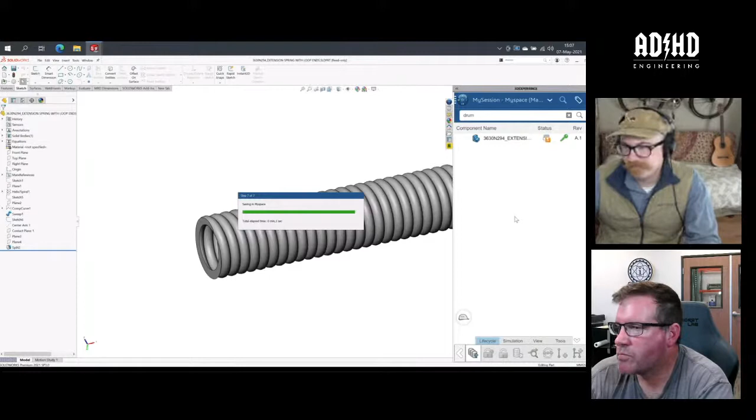I think in the next version we need to just turn parts, like out of Delrin, for these drum tips, and then make the shaft the right size so it has the right flexure you need. Just flip it. So now we have... Delrin drumsticks aren't going to sound the same. You got to use the wood one.

So now we still have 2 configurations, but the difference is that we can go in just like before and select which configuration we change this to. It's like a sub configuration, but not really. So in this case, now you see this is a little bit more complicated. Now I have the configuration of the part, but also which configuration even applies to in the first place.

So which one are we on now? We're in the 42 millimeter display state. So we need to make sure that this is selected to be 42, and it's only for this configuration. And now enter. Boom, now we have a short drumstick.

So if I change to 50, you should see that now it's longer, but I want to make sure we also select that. So now this one is this longer configuration, and now we're saving it to this configuration. So now, every time we change this configuration, it's longer and shorter.

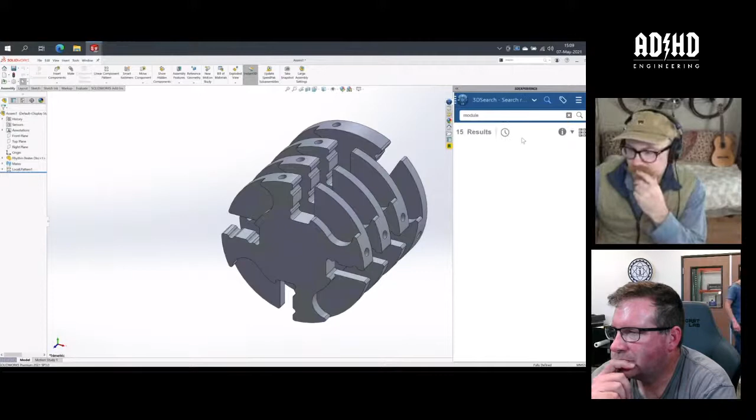Nice. So now when I populate this in, actually it doesn't even go into this—it goes into the module, which I haven't shown you yet. I guess I could open that. When I open the module... I've actually already made it, so that's good.

Okay, so this is the module it fits into, and this thing itself has configurations as well, so that you can pick the sub configurations. So now if you go here, actually there shouldn't be—I could have a long one, but frankly I haven't added it yet. I deleted all that stuff before this so I could show you guys how that works. But essentially, that's the plan.

You're going to have a configuration in here to make a long one and a short one. Tell you what, let's do it right now. Let's add a configuration. Okay, so now there's the default configuration, which I believe is probably going to...

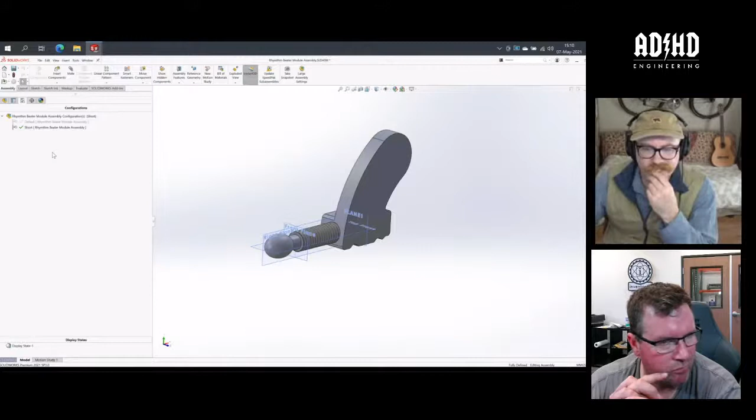Do you have to do it that way, or in the assembly view, could you just pick the subcomponent of the module and pick your configuration? I guess you couldn't, because it would change it for all of them, right? Yeah, so, right. Okay, sorry, I actually wasn't listening when you said that—can you repeat what you asked?

Well, let's say if you didn't make 2 configurations of this part, and you had these modules populated throughout the assembly, would you be able to change the configuration without it populating to the other modules, which themselves don't necessarily have to change? Would all the modules update if you change the length configuration within that part? No, only in this case—if you notice, there's only one drumstick tip assembly. But if there were 5 of these, it would only apply to this particular drumstick tip assembly. Take this subassembly and put it back into the larger rhythm beaters, and you still have granular control of your length.

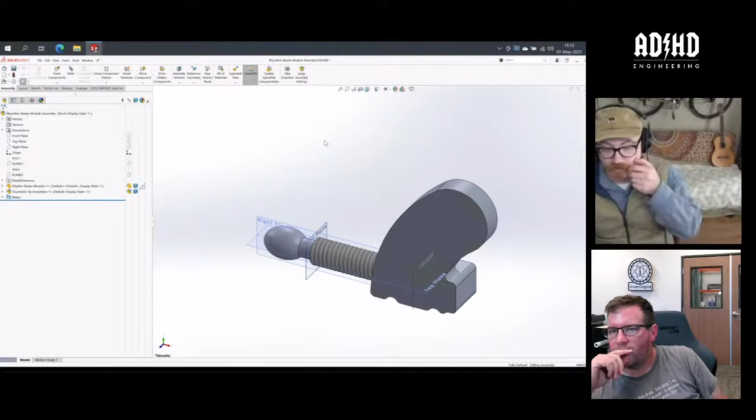That's the question I'm asking - would you have to have configurations of the subcomponent? Amos is saying yeah, which is what you want to do. I was just wondering if it was a necessary step. Yeah, so that was the trouble I ran into - I had painted myself into that corner where I ended up not making subassemblies and then configurations of those subassemblies, and I ended up doing exactly what you asked, and it caused that problem. So this is why I'm trying to fix it, which is why you go into the base parts, making them configurations based on their own particular different lengths, and then you can go and configure what they live in, and then tell that which version of it you want, and then you pattern that thing. So yeah, thank you Amos, appreciate that.

Okay, so now we're in the drumstick tip assembly / rhythm beater module, and we've created a configuration for a short one and a long one, so now all I got to do is choose which one gets which. For the drumstick tip assembly, since we're in the short version, we're going to pick the 42, and it's only in this configuration, then check - and now it should give us a 42, which I think it did. And if we check the longer version, we pick this guy, say the default configuration and only in this configuration. Did it give me - I don't think it changed, did it? Why did that not change?

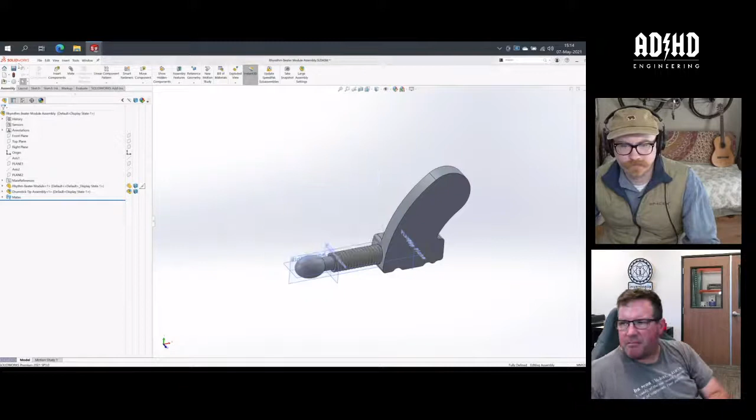Huh, this is bizarre. I don't know that you selected it. Maybe I need to press Control Q. Let's do it, worth a try. No, didn't do anything.

So, okay, this is our drumstick tip. The default configuration of the drumstick tip is 50 millimeters, we know that. So if we go back to the assembly that contains it, and we select the default configuration of it, and this configuration - okay, maybe that is 50 and I just don't notice it. Just switch to the short one. How is your mate set up? That's it, that's it - you asked that right as I saw it. Yeah, okay, I realize now what I forgot to do.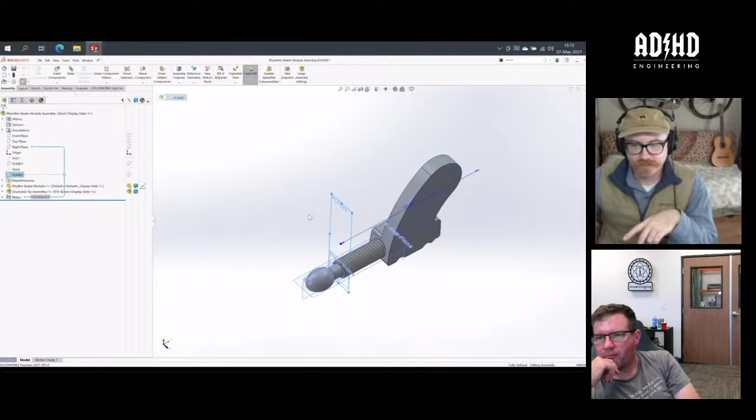So I'm mating it to this plane, and this plane is set up for 105 millimeters from the center, and that also has to change. Yep, so let's go back to our default configuration. Okay, we're in our default configuration, that's fine. Let's now go - I think we get it. I do have someone coming to visit me in about 10 minutes, so we don't need to fix that.

But let's recap it, right - if we're going to make reusable components, let's say with this drum tip, then we can do that with configurations, and each of those configurations - like you could do a custom fastener library this way, right? You have an M6 bolt with different lengths. I know they have a smart fastener library which we'll use, but you would need a configuration of each granular part that you want to be able to select different versions of. Right, and you'd just make sure that when those things change, you have the mates set up so that it works. And then, yeah, I can see us using this all over the place.

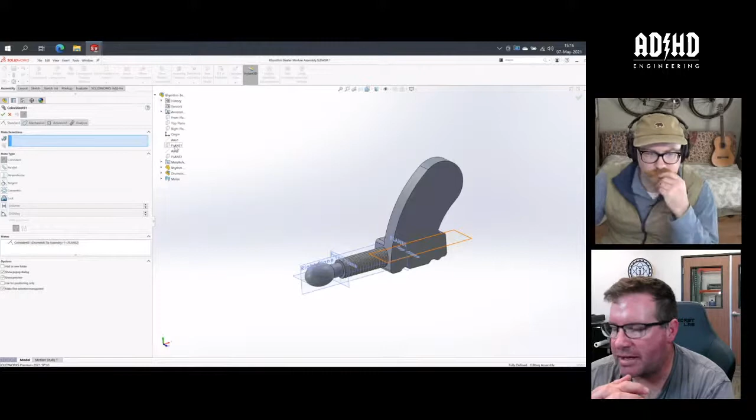I mean, the white versus black knobs on the trigger releases, the funnels for the drums are different sizes - that could be a configuration. How big the tines are - I mean, we can do all sorts of fun stuff. I really think that's cool. Yeah, so I realized - there we go. Just to give you a quick visual to close out.

Can I chime in real quick here? Please do, please. The 3D Experience platform handles configurations a little bit differently than just how SolidWorks handles them - it makes a separate, essentially a separate part file on the platform for every configuration. Yeah, we noticed, yeah. So that is kind of one of the things to think about.

It probably doesn't hurt anything, it's just something to be aware of that's different from standard SolidWorks functionality. And that's the thing where they have a cat - when you open a file that says CAD family, you're opening up the CAD family, which is basically the master file. And then each configuration is - I forget what they call it - the product. Right, physical product, physical product.

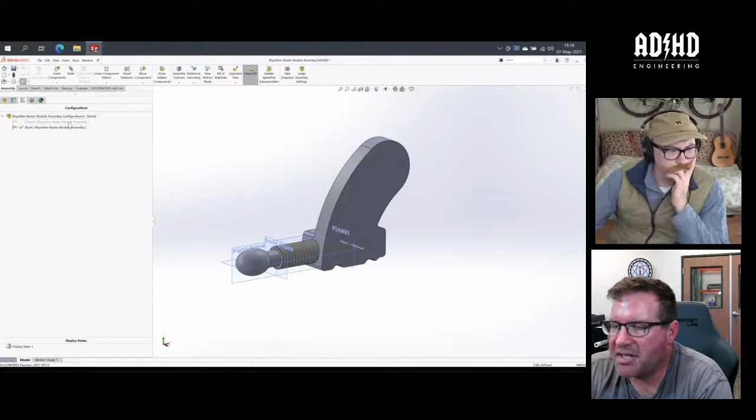That's right, yeah - it does make looking at it through your 3D Drive and seeing all of those duplicate things a real... it makes it hard to look at. And there is a way to help that, which is to turn on a filter which only shows one or the other - so you turn it on so it only shows physical products or CAD family, depending on what your preference is.

So now, Amos, you can't see it, but David has made a configuration so that you can see the normal version and the version that's like it just walked out of a cold pool.

Yeah, it wasn't too hard, so I can even bring this into the disk and then pattern it. Okay, so what do I already have open still? I believe assembly 1 is the one we're working on. I'm actually going to delete this pattern because it's not really needed anymore.

So the rhythm beater disk is in, and I'm going to bring the rhythm beater module in, and we're going to put this in here.

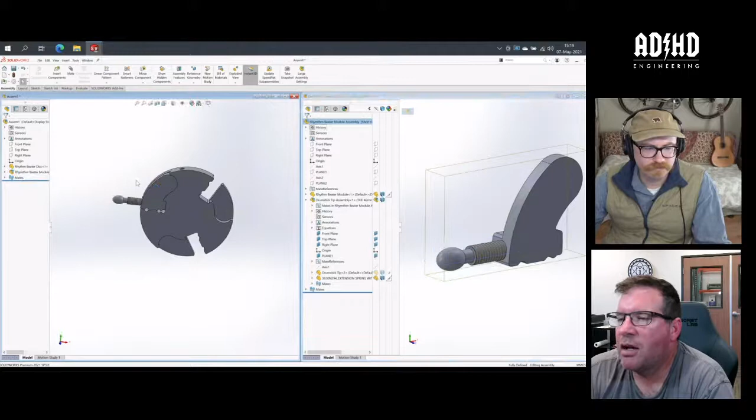Now you can drag those things. You see how it just snaps? Mate references there—that's the mate references, it made it just go poof instantly in the right spot. Oh, that was nice.

When you drag another one, will it go into the same spot? It will, yeah. So now I'm gonna pattern it anyway though, right? He set that up for a nice demo.

Number of patterns isn't a global variable, right, which you'd have to do in order to make them both drive off of one thing. Well, so I can't make them drive off— I was going to say just do a configuration with the pattern number and all that kind of stuff. Oh, just—and I will. Yeah, it's okay. So first I'm going to pick this guy as the corner.

Now, I didn't put an axis in because, frankly, I just made this from scratch. I could have put an axis in. In fact, you know what, I am going to put an axis in because that's usually what I like to go by. I think it's far better than using a physical face.

But you have an axis—if you just show hidden, you'll have a hidden axis in there. Yeah, show the hidden axis. No, it's too late. Oh right, yeah, you're right, I could have done that. All right, it's too late.

The lazy man's axis. Anyway, so now that my axis is there—because frankly this is a philosophical question—for me, I prefer to mate off of reference geometry, not off of part geometry. Because if you do it off of part geometry and something changes, and now you no longer have that part, your model's going to blow up. But if you do it off of durable things like reference geometry, you're not going to lose that.

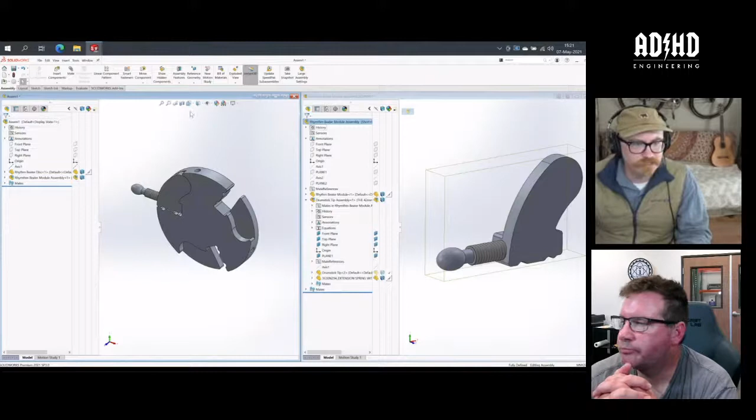And if we select it, there should be a 3 that shows up—and there it is, you see the 3? Boom. So you have to double click it, or else it'll just give you that little box. But I want to...

Boom, okay, now we're going to go equals, and let's call it modules. So now if we go in our equations, we already created one called modules.

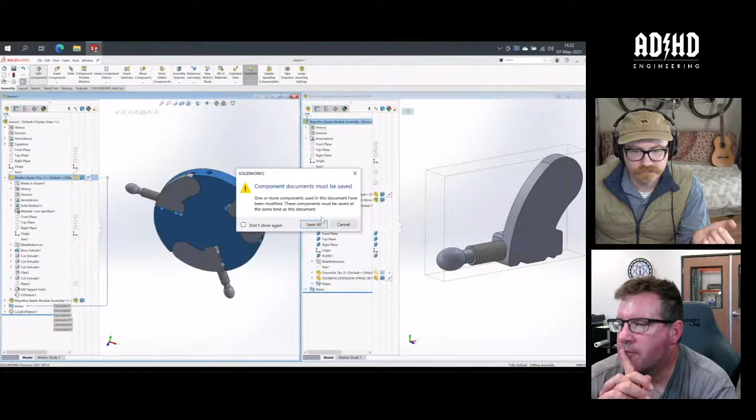So now we can technically go to our rhythm beater disk 1 and edit this. You must save and hit Control Q. That's okay, I'm going to throw this away as soon as—so wasted—but I will press Control Q.

Okay, so now that we're editing the rhythm beater disk, we can go into our circular pattern, grab that same 3, and tell it to equal this. Equals that. Boom. So now when I change that...

Another 15 minutes? No, 4:30. We're here. So now I can go in and say equations.

Actually, let's finish editing the component. So now we can go in our equations.

Why don't we just do it Monday then? Sorry, David. That's okay, go for it.

Now this should populate. Unfortunately, it did not populate that. But I guess if we press Control Q.

Pressing Control Q fixed it. Now you see I've tied both the cutout and the circular pattern for the modules.

Now I can go in and say assembly 1 configurations, we will add one. Let's just say 3.

Boom. I gotta step off, guys. Thanks, we'll see you later. Appreciate it, man. Take care.

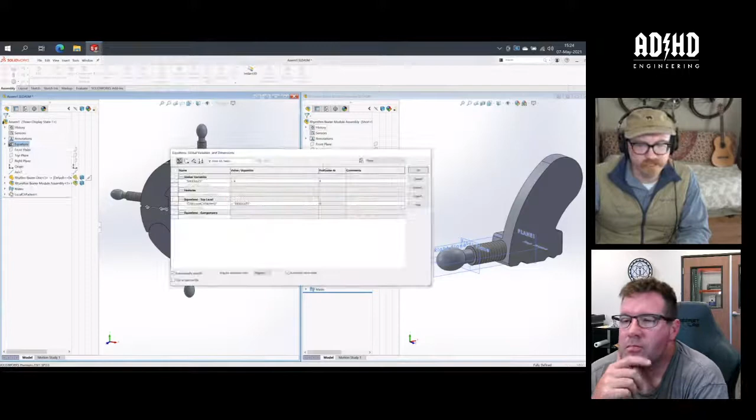Ben, thanks for coming. Okay, so for 3, we're going to make it this configuration and go okay. Now Control Q. Whoop, not A. Control Q.

Talking to a pretty girl, Control S. I might crash and burn, Control S. Well, at least when you're dealing with SolidWorks, you gotta Control S all the time.

Although the annoying thing now is that it has to upload it. Yeah, it's slow, it gets annoying. Ooh, and it didn't... sometimes it doesn't reserve the top level. I don't know why it does that. That is weird. Okay, so I have to go back to my rhythm.

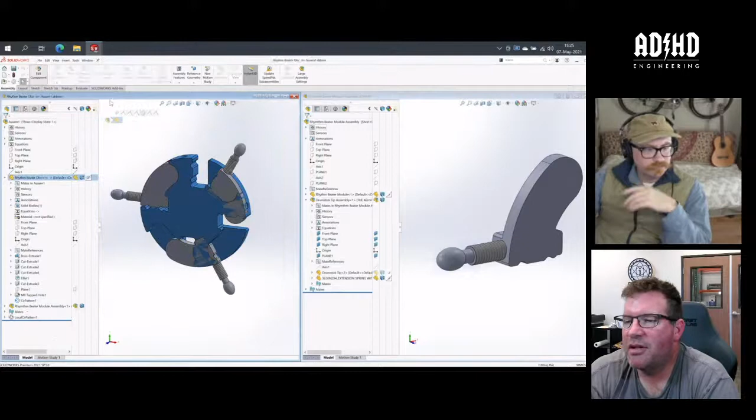Figure it out, did not do the cutout. Yeah, did you not assemble? Did you not pattern link this one to that same global variable? The configuration on the disk. I don't think you- oh, look at that! I only made it go for one configuration. I need to make it for all configurations. That's why it didn't repopulate, because I didn't tell it to. Imagine that.

There it goes, okay, hey, so now, yeah, so now if I should be able to...

Pardon my French. Yeah, man, just doing it for this configuration definitely takes a lot of time, having to go back and forth and figure that out.

Well, again, you wouldn't be having this problem if we designed it with configurations in mind, right? You would order your stuff differently, right? We're watching David fix something that wasn't optimized this way.

But yeah, so the other way is creating a config and then going into my top level assembly and saying, okay, this is a configuration of 4, so make 4 of those. This is a configuration of 3, so select the 3.

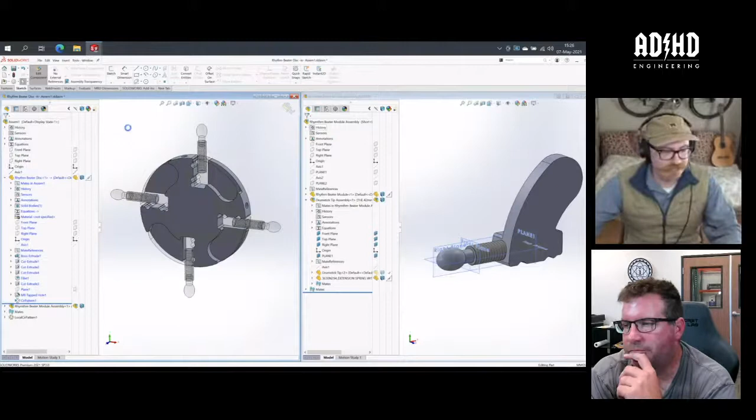I was trying to make it automatic, and it wasn't working. I'm with you, I think it would be better if it could be automatic. It'd be awesome. But it seems maybe if I do Control Q now, how you could, right? So hold on, yeah, wait. This particular model is a little less interesting, but it's obvious that you can.

So wait, the problem is that it's not switching the configuration of the beater disk when you switch the configurations of the full assembly. Yeah, so ultimately, but it's doing it on the spring though, so that's interesting.

Yeah, so ultimately, for the marble machine, there are going to be 4. There's the triplet, which uses 3 and long beaters. There's going to be the quarter note, which uses 4 and the short beaters. There's going to be the offbeat, which uses 4 cutouts, but 1 short beater.

And it's in the 180-degree position. And then there's the whole note, which uses 4 cutouts, a long beater in the normal 270-degree position, and the second one I meant 90-degree position. So it's

like there's only going to be 4. There's no infinite variety, there's just going to be 4. Essentially, this assembly 1 configuration is really just going to have triplet, quarter, offbeat, whole, and it's not going to be this infinite thing we can pick from.

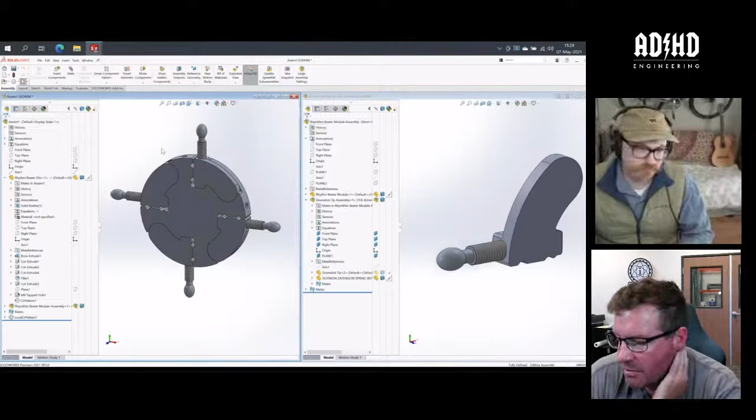It almost makes me think differently about this. There are so many different places where you could use it. You think about your assembly differently structurally when you know you can do configurations. The whole machine is going to be full of a lot of that, where you can even do fasteners like that.

If you look into smart fasteners, that's the way they build it. They have this weird sketch at the beginning that usually contains all of the data, which is kind of annoying. It's not really how you should build it, but it's an internal SolidWorks thing, and that's just how SolidWorks pulls the data. But to change from a 50 millimeter fastener to a 100 millimeter fastener, all they do is change one data point, and then you have a totally new thing. So it's kind of neat.

If all you're doing is changing a length like that, you don't really need a configuration, you just change the length of that feature. You don't need a separate whole part that you're pulling in. Well, yeah, but if you're using multiples of that same part in another assembly, like if you have 15 M3 bolts, some might be 15 millimeters long, you could just use a different configuration of the same part.

Sounds like a philosophical question to me. Yeah, yeah.

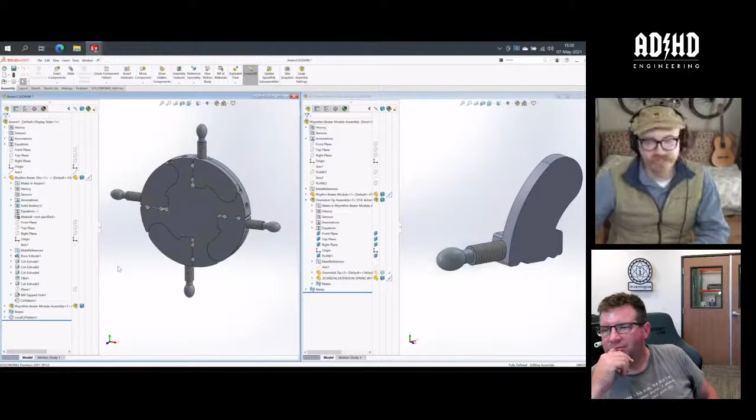In the case of just random screws everywhere, those are going to live up here in a folder. You don't even see it because it's for selection sets. When you have a selection set, you can just suppress all of them at once, so fasteners should be suppressed by default. If you really want to see them, be prepared to watch your computer chooch for about 10 minutes, but when it does, great, you have your fasteners.

That's kind of how we should do it with the fasteners. But if we do it with McMaster-Carr Integrate, the only thing is they have to be modified first, sort of like I modified these screws to be short. You might have seen these are a pull spring that has a hook on the end, and I had to get rid of all of that.

But the neat thing is McMaster-Carr still sees it as that part number, so it knows that you need to buy it, right? And now you notice how there's 4 in there, so it's a pretty smart feature.

It's the same deal with screws. We should include them, but they have to be modified to eliminate all the thread first, because there's no way you could possibly do that practically. Super cool, but it's super simple to do. Once you open it, it's not hard. I'll show you an example of that, because I have one.

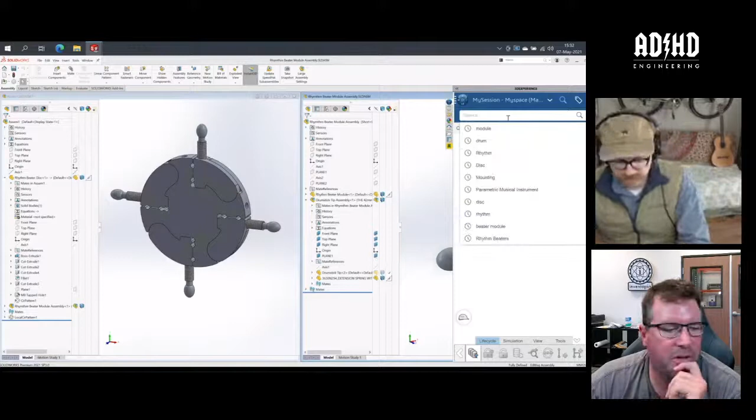We're gonna need to taper this thing off now. Okay, yeah, we need to go. I have someone who should have shown up by now already.

All I did was suppress the helix, and by suppressing the helix, it suppressed the cut sweep and the rest of the stuff it doesn't need. Oh, it suppressed all the child features. Yeah, that's pretty good, so you don't have to go in there and do a bunch of modifications. Yeah, that's nice, yeah cool. And then I just added the hole.